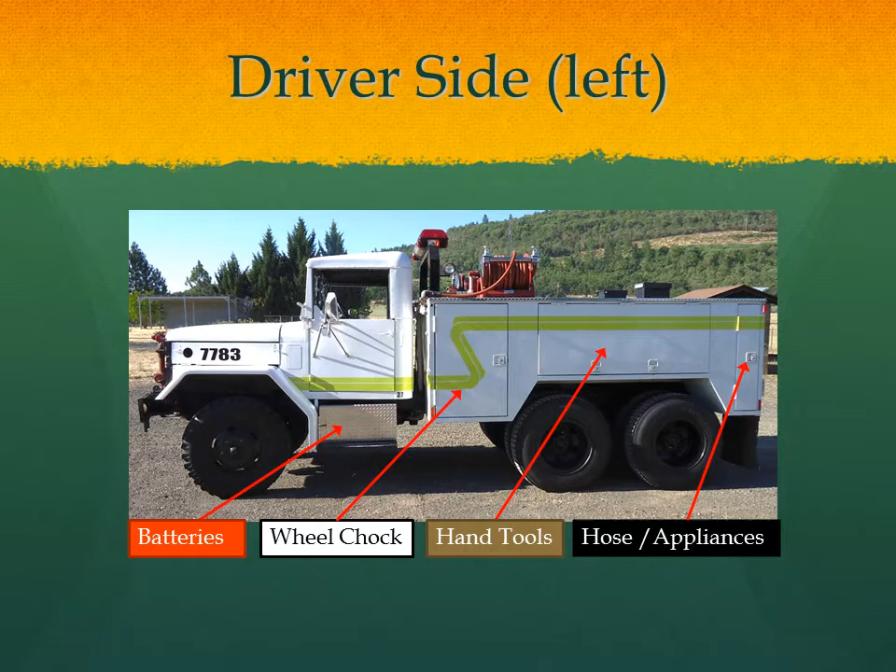Here is 7783, the Wildland engine. Please take general note of the compartments. This is on the driver's side. We have the battery compartment underneath the cab. The first compartment contains wheel chock storage space. The main compartment has hand tools. The rear compartment has hose and appliances.

On the right-hand side of the vehicle, to the rear we have the rehab compartment. The main compartment has utility rope and some tools. The front compartment has the chainsaw with its tools, and we have fuel for the pump and for the chainsaw.

The 50-gallon diesel fuel tank for this engine is underneath the cab on the right-hand side and is also used to step into the vehicle. Please pay particular note to the exhaust stack. This exhaust stack will get very hot while this vehicle is in operation. Never use this as a handhold.

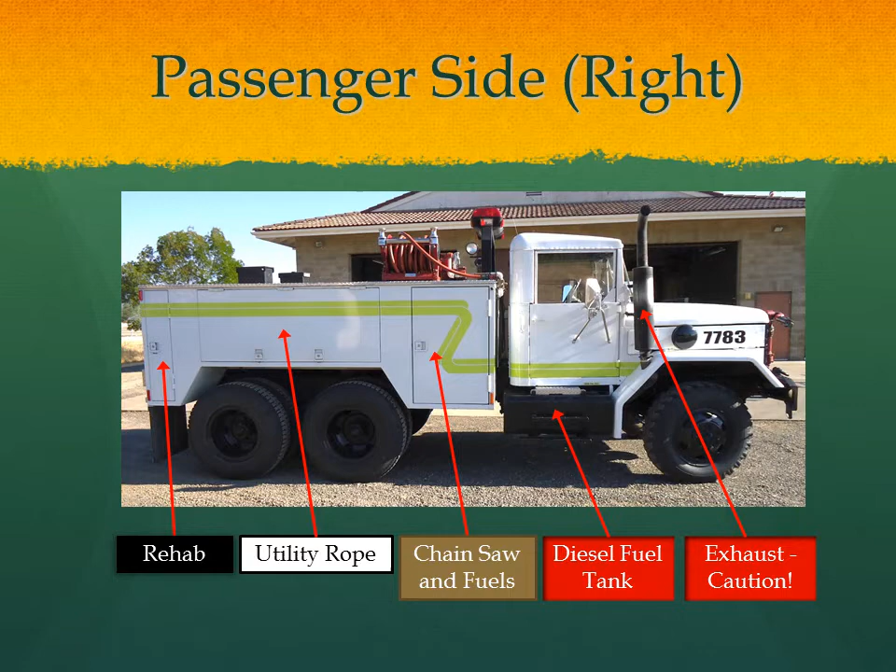The front and the rear of this vehicle are the business ends of this engine. From the rear, you will see the utility bed with the Wildland tank and pump insert. On the front of the vehicle, we have the front-mounted monitor. This is remote controlled from inside the cab.

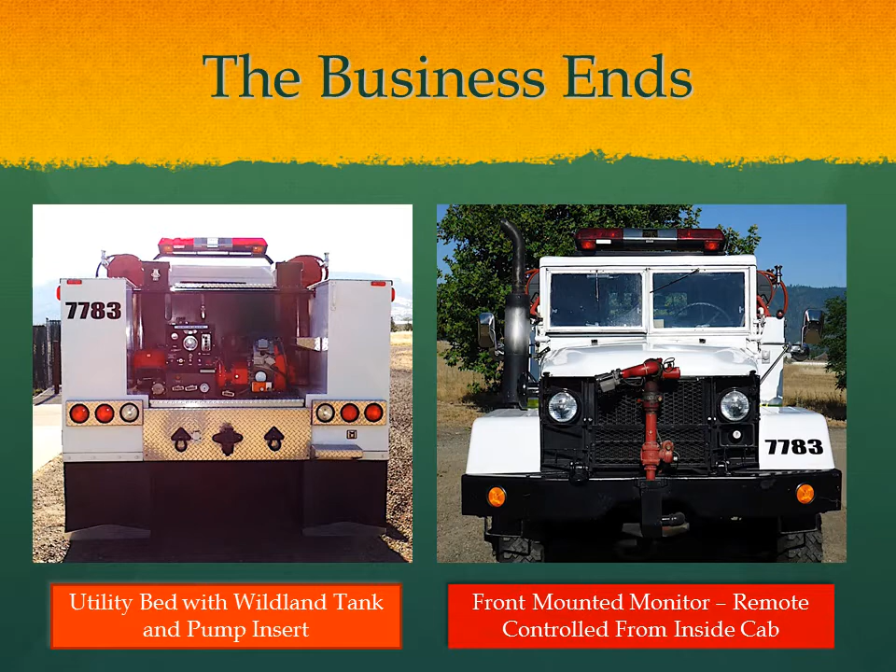As you enter the cab, be sure that before you climb in, notice the limited creature comforts. Use caution as you climb in. It is easy to bang your shins on bare metal. Particular safety note: the parking brake handle is just left of the driver's seat. It can be easily disengaged as you enter and exit the vehicle.

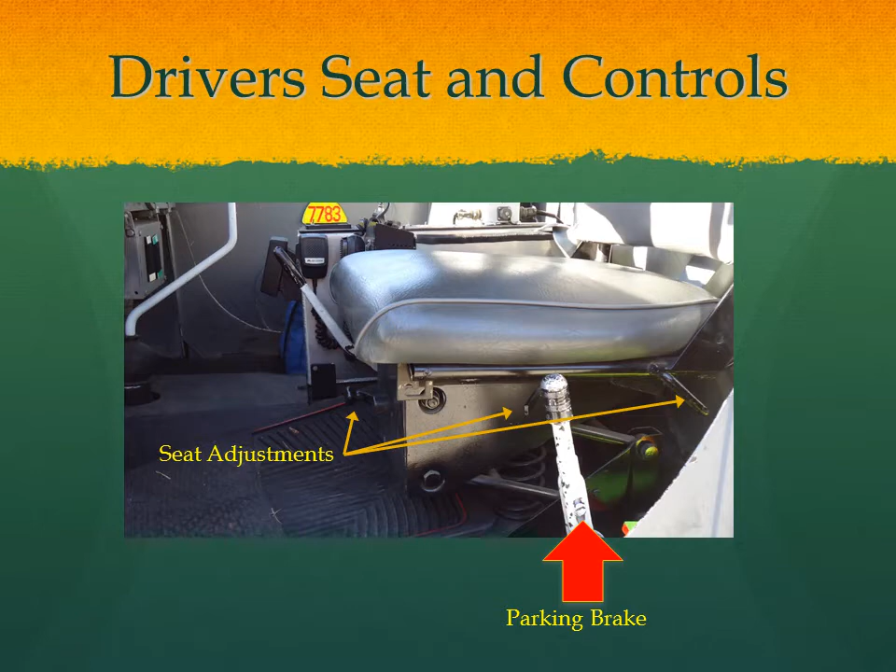The driver's seat of this vehicle has 3 points of adjustment. You will also please take note again of the parking brake handle just to the left of the driver's seat. Again, this is easily disengaged as you enter and exit the vehicle. Please be cautious.

From the driver's seat, as you view the dashboard, just to the left of the steering column, make note of all of the signs that are posted in here. These all have important information, so be familiar with what these signs present to you.

The master battery switch is located in the main part of this panel. You will also take note that the headlight switch is underneath the master battery switch. This prevents the headlights from being left on when the vehicle is turned off.

Take note of the engine stop. This is what you pull to stop the diesel engine when you are finished with operations. Underneath that is a manual throttle control. You simply adjust the throttle by pulling this out and locking it into place.

There will be very limited times when you may need to use this, although it can be useful when you are on scene and sitting idle for some time.

There's a panel underneath which has a switch on it. This is designed for heating in the engine when you are starting in extremely cold conditions. This is not something that we generally need to use, so just be aware of what it is, but don't plan on using it. To the right of that, we have the pneumatic windshield wiper control. This is basically a dial which adjusts air pressure to the windshield wipers.

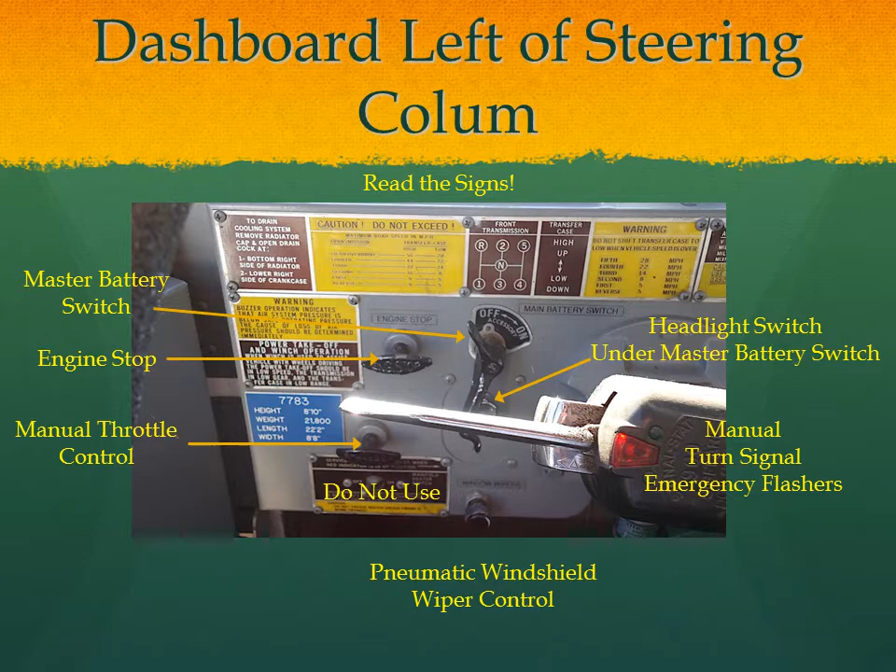On the panel to the right of the steering column, make note of all of the gauges and the buttons that you have here: the oil pressure gauge, speedometer, the tachometer, your temperature gauge, and the air pressure gauge. Also the voltmeter, which tells you the condition of the charge, and your fuel gauge.

You have two little lights that are on the dash, which are for the headlight operations. One tells you that the headlights are on, and the lower one tells you when the high beams are engaged. The starter button, you will notice, is at the lower end of the panel, just to the left.

And you have a front transfer case switch lever that's just underneath the dashboard. This is something that is generally not going to be used. The all-wheel drive on this vehicle is fully engaged and automatic at all times. This can be used in extremely slippery situations such as mud or in ice.

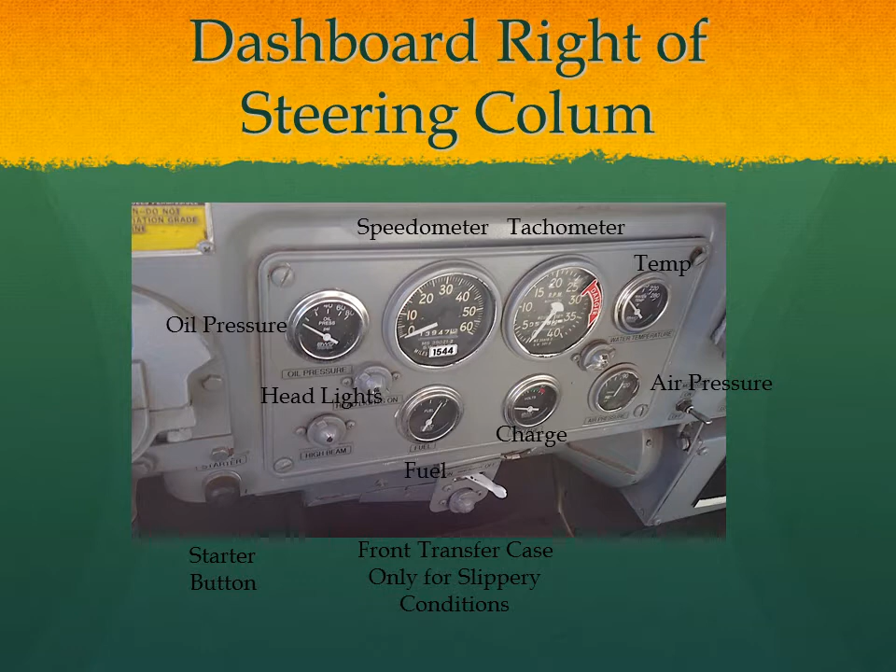The front transfer case switch is only to be used in extreme conditions.

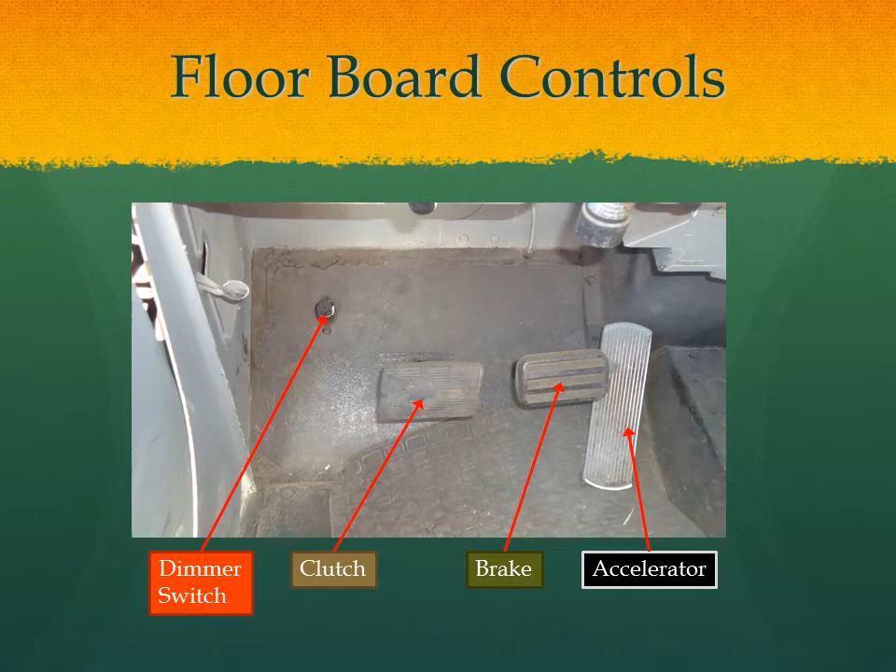These are the floorboard controls. You will notice the manual dimmer switch is operated by foot. You have your clutch pedal, brake pedal, and the accelerator.

The front-mounted monitor control is in the middle of the dashboard. Please take note of the monitor power switch. When the vehicle is not in use, this monitor switch needs to be turned off. Otherwise, the monitor will remain on at all times, and this can drain your battery.

The joystick gives you full control of the monitor, the direction and elevation. The stream control is a toggle switch on the top of the joystick. This will change your stream from a straight stream to a full fog. Play with this and you'll get familiar with how this works.

Take note of the water valve switch that's on the joystick panel. When the switch is turned to on, water will flow from the pump continuously. When the toggle switch is flipped to the joystick side, water will flow from the monitor by using the water hand trigger that is on the front of the joystick.

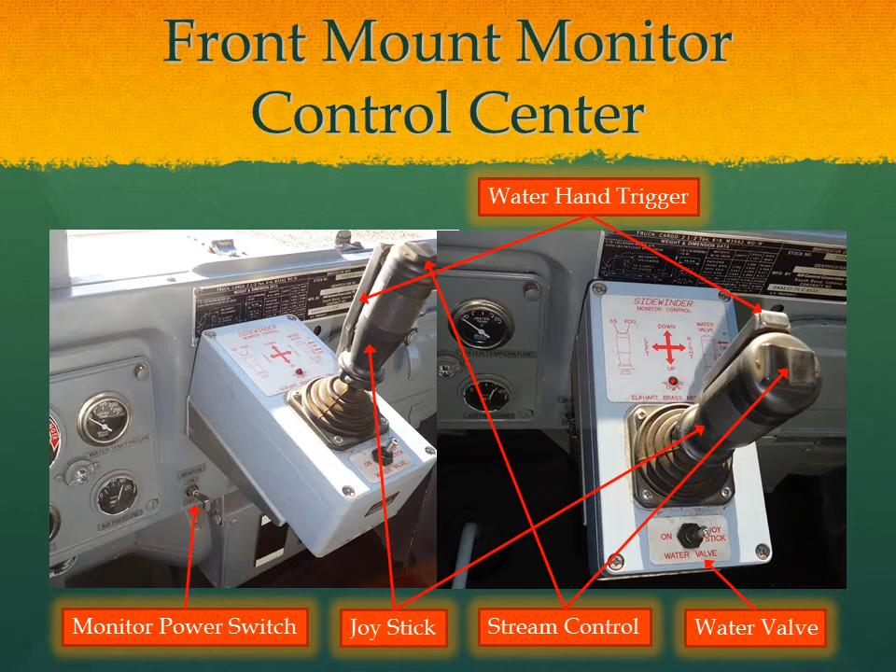This is the front-mounted monitor that is controlled by that joystick. It has servo motors that control all of the operations from within the vehicle.

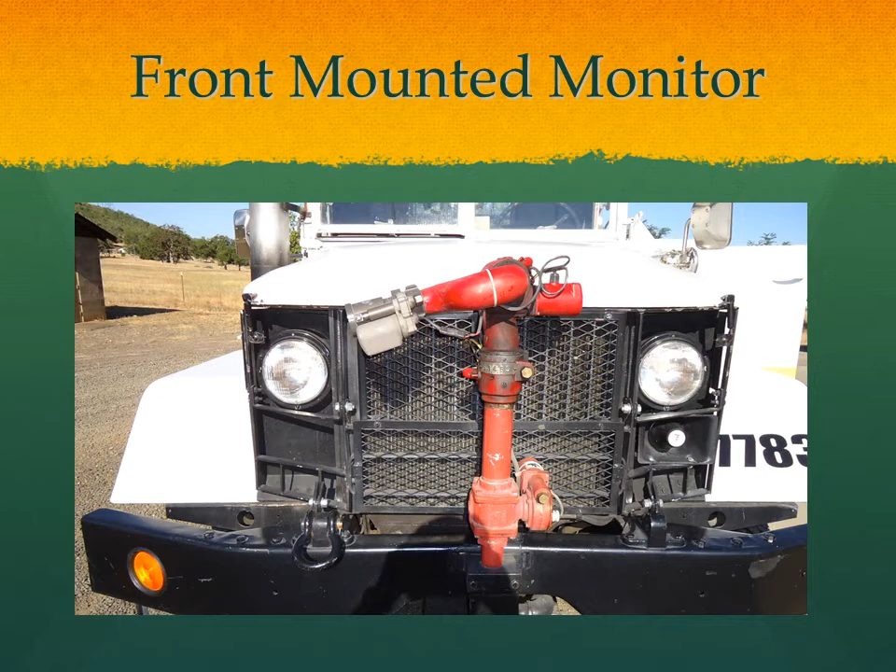Please take note of the factory air conditioning installed on this vehicle. Pretty simple, you crack the front windows open.

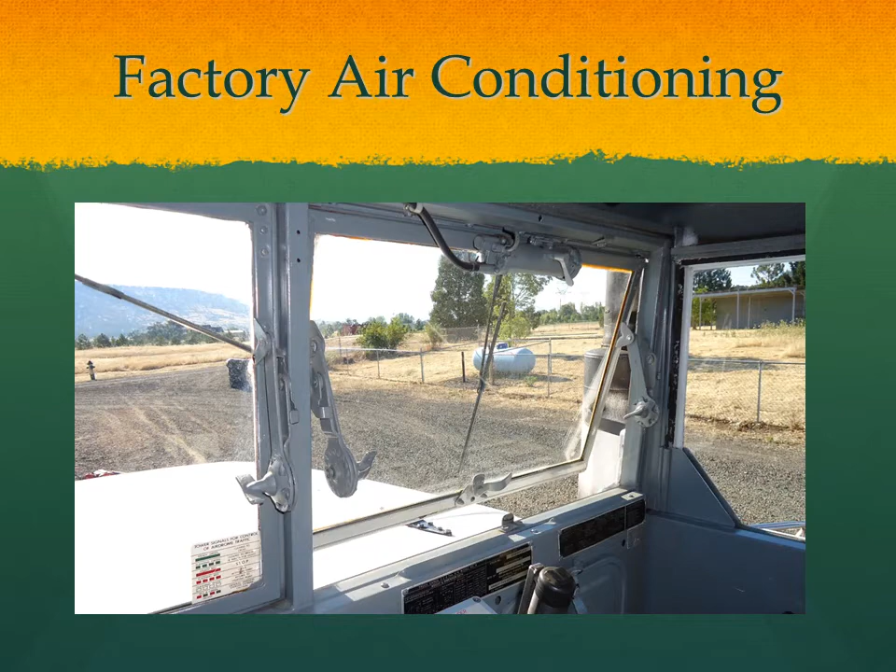Here's the communication console in between the two seats. You have your headset controls. A water tank level indicator is on the panel. You have your fire radio. Note that the portable radio charger on this vehicle does not work for our current handheld radios.

There's two microphones, the radio microphone and the PA mic, both mounted on the front part of this console. Your siren and code 3 and working light switch is on the left side of this panel.

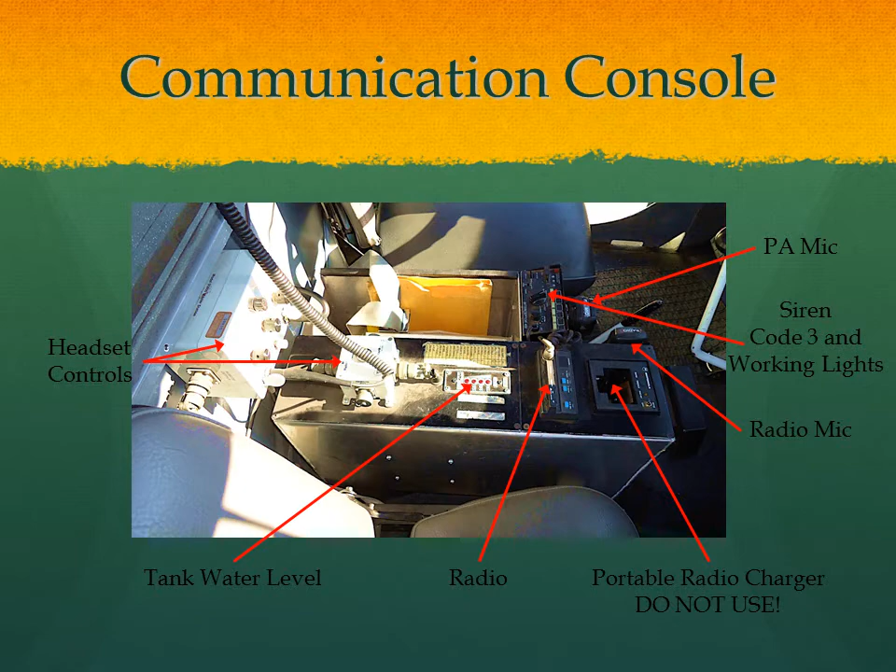This is looking in through the right side of the vehicle. Please take note that the fire shelters are in a blue bag underneath the seat. The glove box includes a safety vest and has the insurance card information for this vehicle.

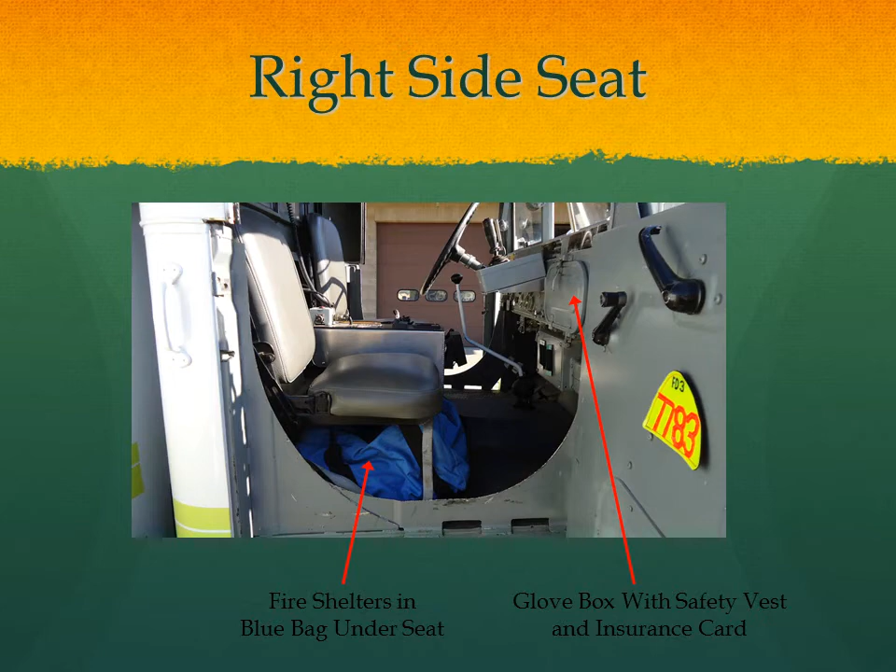Okay, the pump and tank insert as seen from the rear. You have the pump panel. This is the same configuration that we have on all of our Wildland engines. Note the position of the fuel tank.

Down below that you have the drafting port, the primer button, and then your pull-to-draft valve. To the right of that you have a 1.5-inch discharge and a valve. Further to the right is the tank fill valve, and then to the right again of this you have your foam control.

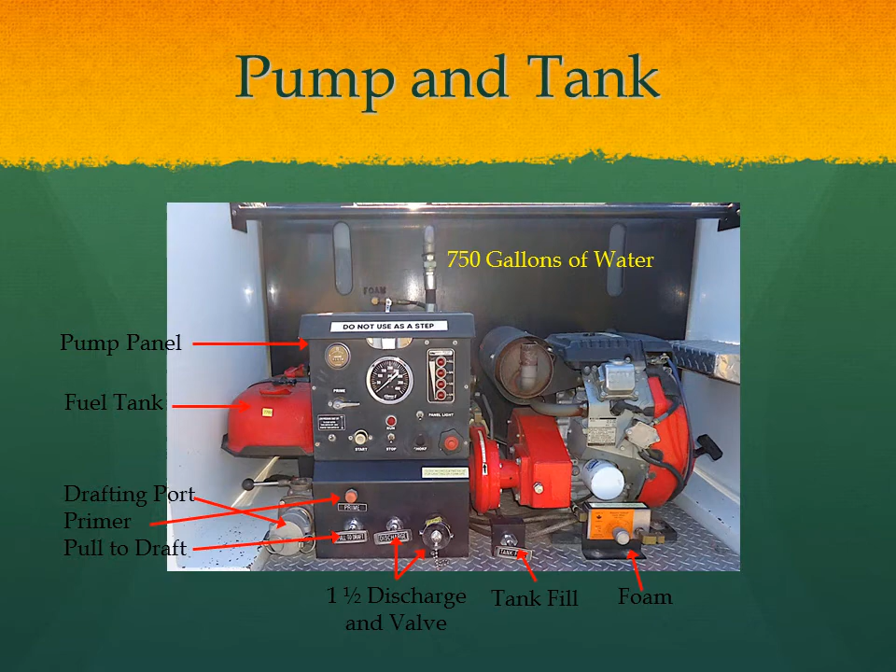The tank on this unit holds 750 gallons of water. To the left of the water tank is the firefighting foam tank. These both have visual indicators to show you the level.

On each side of this vehicle there's a hose reel. Each hose reel has a valve to control the flow. You will be able to see this on both sides of the vehicle, so please take note of its location.

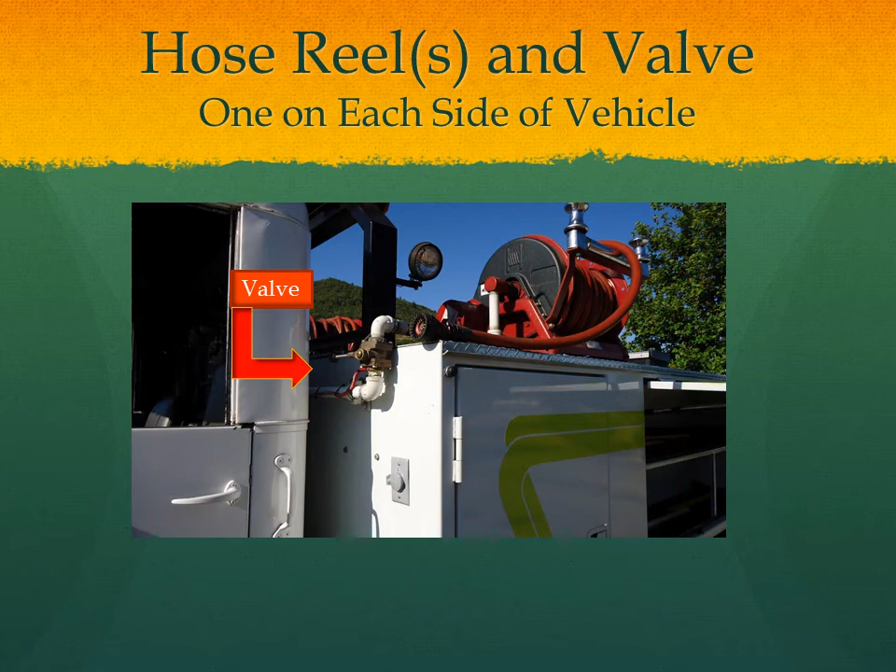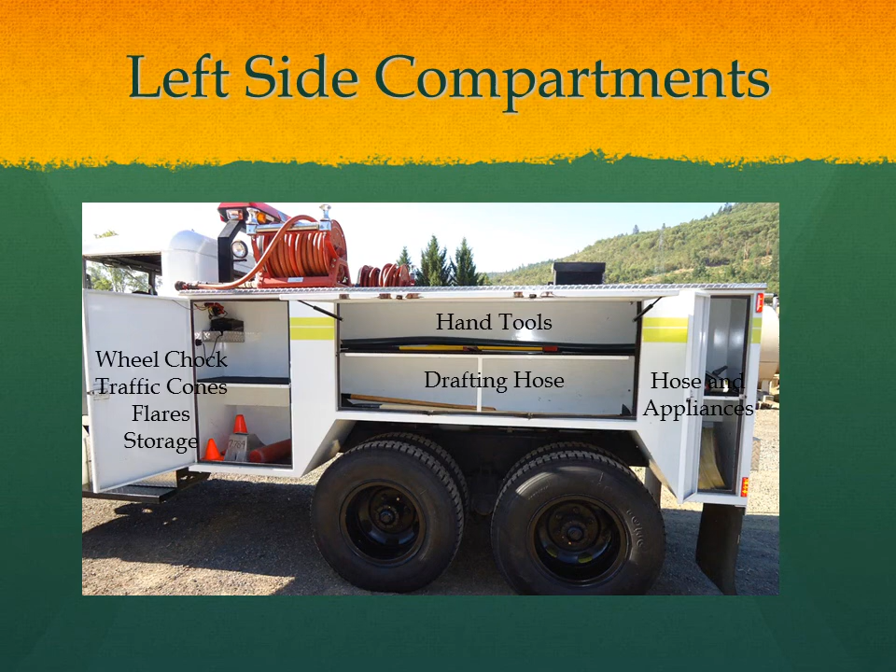Here are the left side compartments. The front compartment has a wheel chock, traffic cones, flares, and storage. The middle compartment contains hand tools and a section of drafting hose. The rear compartment contains some hose and a variety of hose appliances.

On the right side compartments, in the rear we have rehab, and it even has a little cooler in it. The main compartment has utility rope and storage, and there's also some bolt cutters in this compartment. The front compartment here has the chainsaw with its tools, and it has fuel for the pump and for the chainsaw.

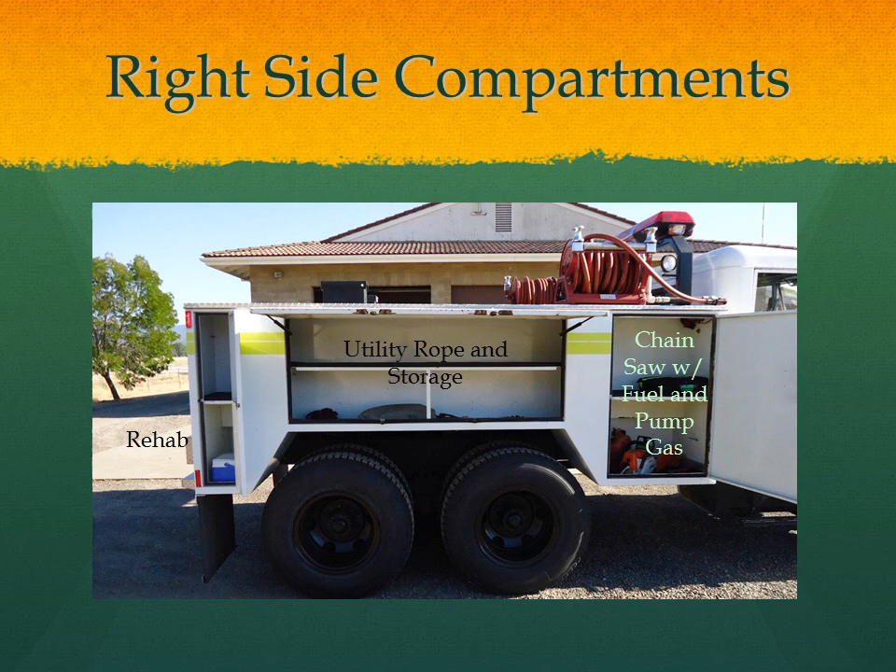Now it's time to move on to the hands-on training component. Thank you.